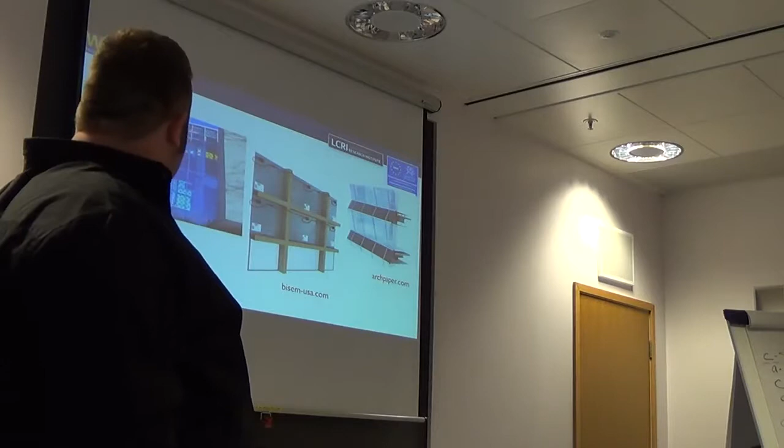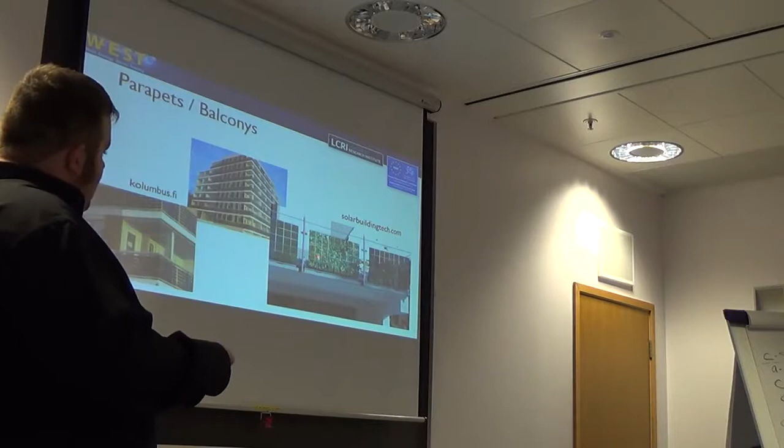Then of course here, they've decided to do something interesting again, where the PVs don't occupy a large area of the glass, they're sort of embedded within it, but in this sort of pattern, so that's allowed an awful lot of light through. And then yeah, we've talked about balcony systems. This is making it visible. It's the same job that a bit of toughened glass will be doing here. It's just that it's got PVs sandwiched in the middle, so it's doing something useful.

So thinking about rooftops, if we've got flat roofs, we can be sticking it straight on the top of the building. And there's other technologies now, Stuart was talking about flexible PV. We're looking at, like, the dye-sensitised stuff that's produced on reel-to-reel. There are technologies now where PV can just be literally rolled out on top of a flat roof building and secured down. But then also, if we've got a large area, we can use angled mounts to orientate the PVs a little bit better in respect of the sun.

And obviously this isn't such a clean look, but if it's not going to be seen, or if it's quite utilitarian, or if it's something like a supermarket where you've got a bit of facade around the outside of the roofs, you don't actually see the flat roof behind, that's something that could be a good option. And then you've got these solar slates.

Now, this system is C21 by Solar Century, and they've designed a solar slate that integrates really well with the Lafarge concrete roofing tile. So the profile is exactly the same. These roofing tiles are just a standard stock item that comes from the builder's merchant. And the C21 solar slate is the same depth as the concrete tile, but it's obviously much wider. And they can be carried up and just screwed onto the roofing battens in the same manner as the concrete tiles would be hung on them.

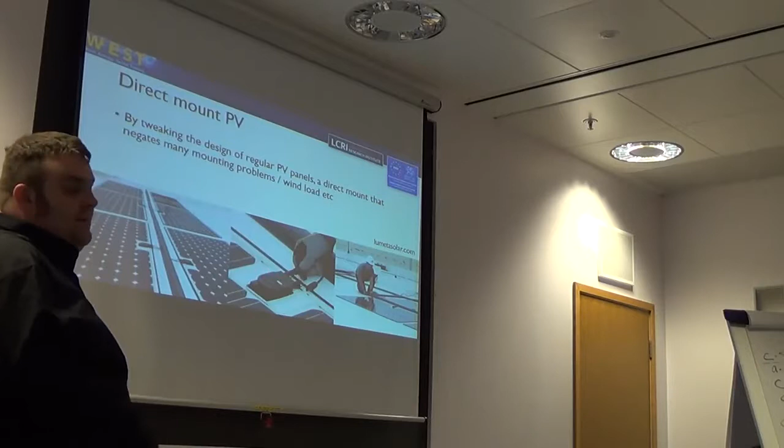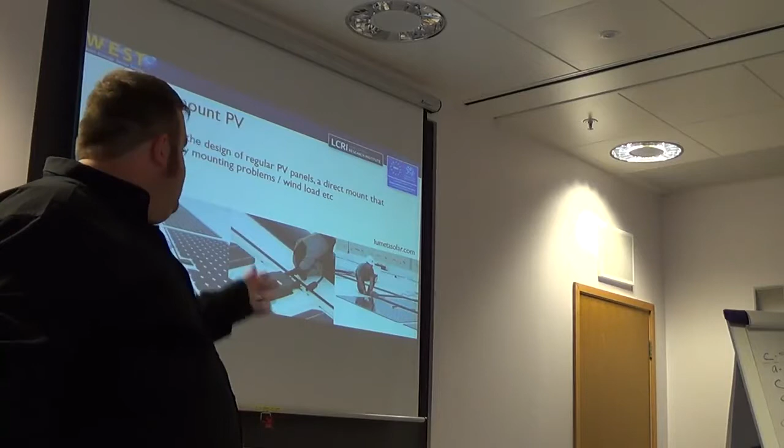We're talking about mounting stuff horizontally onto roofs. These are PV modules where they've said, okay, we'll miss out a couple of solar cells from the top of the module, and we'll integrate small little micro inverters into each module. And the beauty of that is that if we mount them on the top of the module, obviously they're waterproof, ingress protected, all the rest of it, but we put it in a location where it's really easy to then service that module without having to lift it up off the roof or disturb the mounting system. So I think that's quite a smart design where someone's thought about that.

There's a handout at the back and in your packs about different types of inverters and smart new technologies. But this has obviously been designed to be easy to maintain in this sort of commercial application.

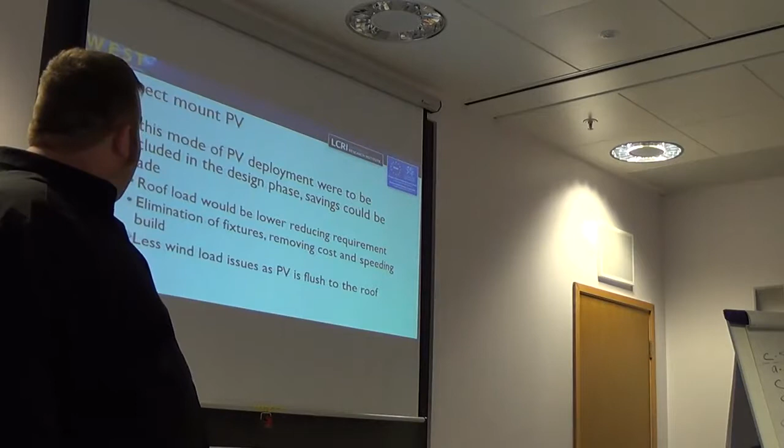Now, a little bit less attractive. You wouldn't necessarily want them mounted on the side of your house with all the inverters visible, but on something like that application, commercial roof, flat roof, no one's going to see it other than if they're using Google Earth. Why not? So direct mount PV, there's different things to think about.

It's going to be lower roof load if you can use the PV as the roofing material itself, because obviously you've not got the additional weight then of a roofing material, a PV mounting system and PV on top. It's reducing fixtures. Wherever you've got fixtures and penetrations, you've got the potential for failure and defects.

And also, there's less potential for wind load because your PVs are flush to the roof and sealed at the edges. There's no way the wind is getting under that and trying to lift anything up or blow anything away. And so we can also do interesting things here with direct mount PV.

And the thing with BIPV, and this is where I think there's a real potential avenue for consultancy firms, is in joining up the thinking between the different trades within the building team. Because at the moment, if it's a retrofit installation, you might get a firm that goes up on the roof. I think, did you talk about a little bit of this in your presentation at all? No, okay. So you might have one firm that goes up, puts your cells up on the roof. Whereas, if you're going to integrate it into the building, there's got to be a lot more consideration of how things interlink.

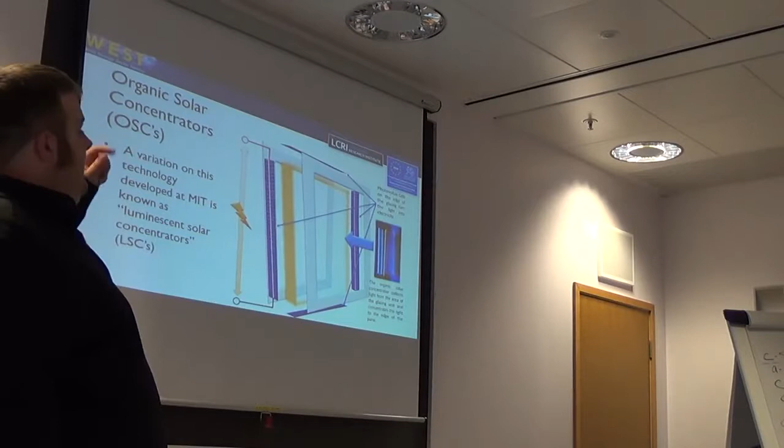And so we've got this idea of organic solar concentrators, which are a bit like, I used to play with Lego as a kid, and I remember there were these bits in one of the Lego kits that I got that just absolutely amazed me, because in ambient light, it looked as if they were glowing, as if there was a little bit of light at the end.

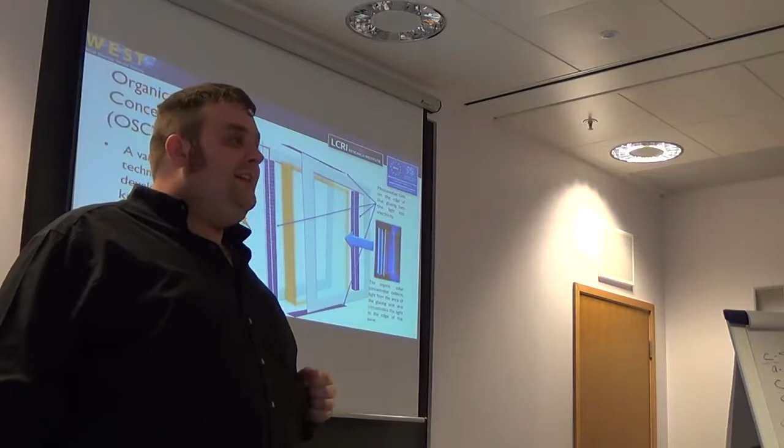And they were like a sort of fluorescent green plastic, and they acted as a waveguide to take the light from the wide area, and because of their shape they concentrated it towards the end where it appeared to glow. It wasn't glowing, it was just capturing the light from a much wider area.

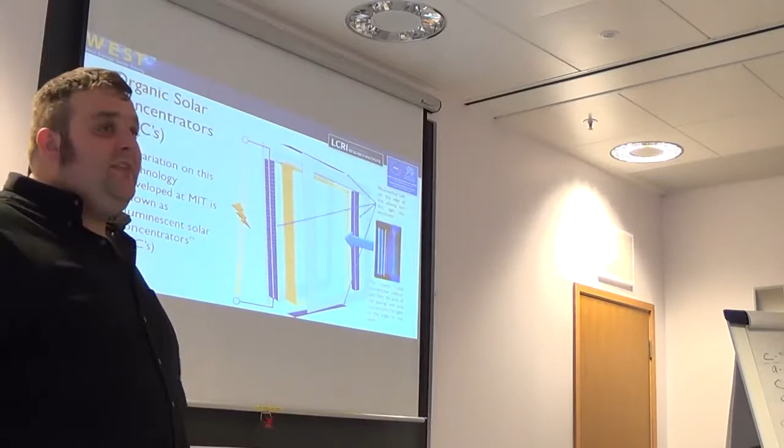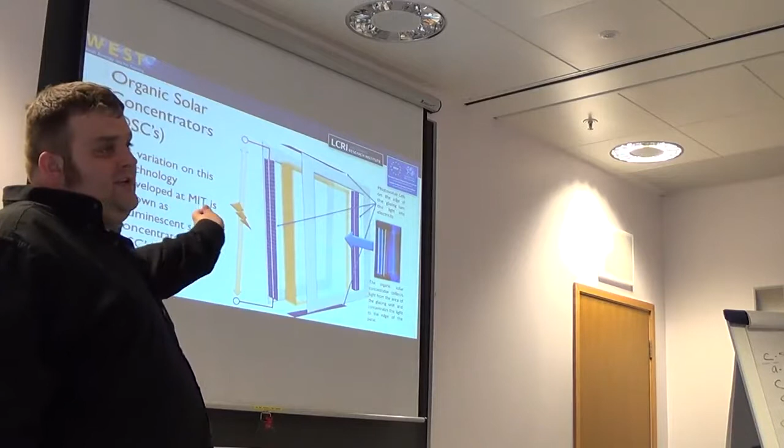And so if you look here, we've got these plastics where they're taking light from across the surface, but the light gets concentrated at the edges, and the edges appear to glow. And so this is potentially where you could put thin strips of PV material in order to generate electricity from this window. And of course the great thing is that it's also semi-transparent as well.

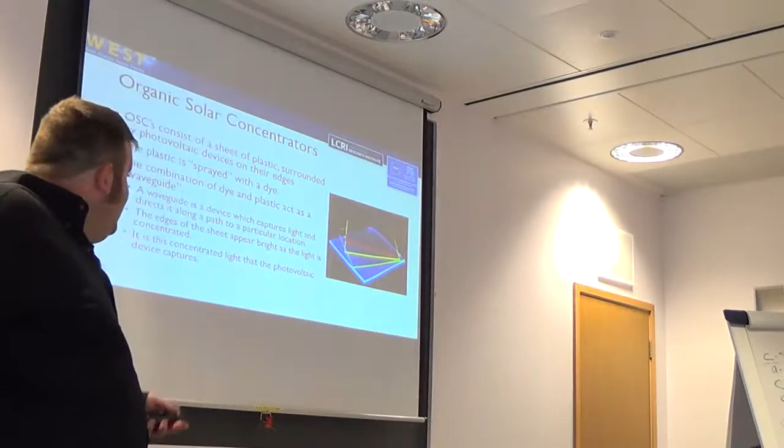So the sheet of plastic is sprayed with a dye, and it acts as a waveguide in combination. And so the edges of the sheet appear bright, and as we've said, that's what the PV captures.

Now, there's a challenge with this, in that as the light hits, the dye absorbs the light, and that causes the electrons in those molecules to jump to a higher energy level. And when they fall back down to a lower energy level, the dyes release that energy back into the plastic in the form of heat. So there's a bit of inefficiency there.

But the light that doesn't bounces around inside the plastic in the same way that, if you think about fibre optic cables, you can send light over vast distances for telecommunications, because the light bounces off the side in a process called total internal reflection. And this is what this sort of device is hoping to do here.

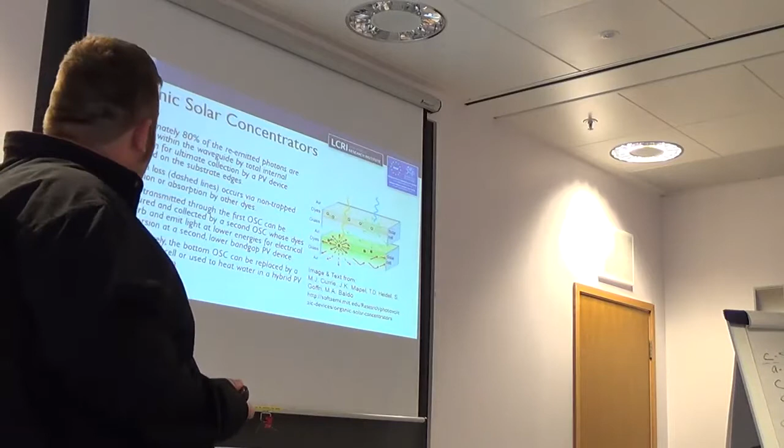Now, MIT, you've got about 80% of the re-emitted photons which are trapped within it. So that's where the inefficiency comes from.

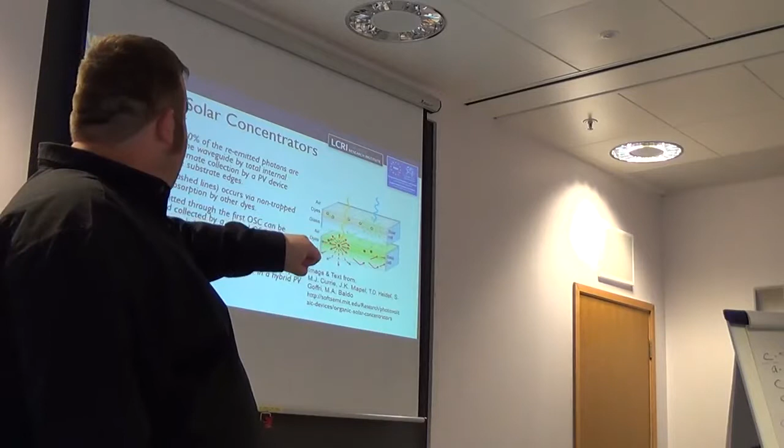And MIT have looked at this and they've said, okay, there's a different way of looking at this. There's a couple of different things. So first of all, they're saying some of the light will go straight through, and so we could do something else by making a multi-layer device. We could put something that captures solar thermal energy, a solar thermal collector, so we generate electricity first of all going through the solar concentrator, and then residual light is picked up by a much cheaper device. That obviously isn't transparent, it doesn't give you the window property.

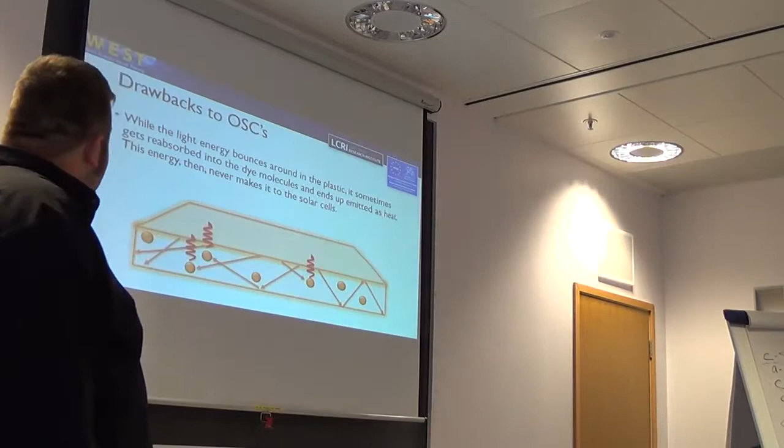Or we could layer these devices and have different sheets with slightly different coloured dyes in to capture light at different wavelengths. But as I've said, where the dyes in this particular type of cell absorb the light energy, you get a little bit of heat produced, and that results in inefficiency.

So MIT looked at it a different way, and they said rather than this sort of plastic with the dye embedded, we'll replace it with a sheet of glass and we'll coat that glass with the dye. And the special dye will re-emit light at a different wavelength from the wavelength that the dyes will absorb. And so this gets around some of the problem of reabsorption and inefficiency.

But this is something for the future. It's not something that's going to be around immediately, but it's looking at the sort of technologies where scientists are starting to look for building integrated PV and for glazing.

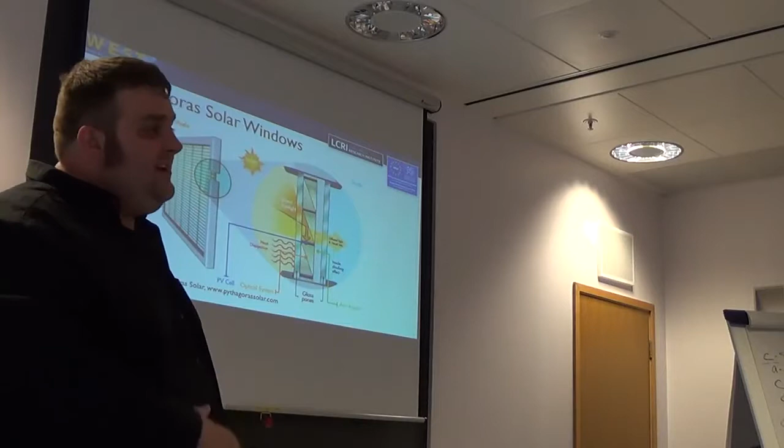Now this is something that is a lot simpler. It's a much nearer term technology because this is just using, I presume it's crystalline silicon, the technology that we've seen. And what they're saying is if you think about Venetian blinds, that hang on one side of the window, lots of little slats with bits of string in between suspending them, they provide a function of shading, and actually if they're all horizontal it's quite good because they capture that high summer sun but they allow the low winter sun to pass through.

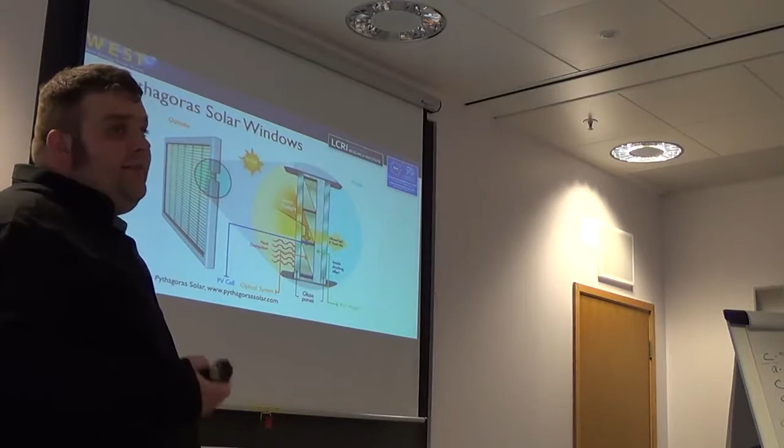And so what about if rather than having a Venetian blind on the outside, and okay, it gives you flexibility, you can pull it up and you can change the angle of the slats and all the rest of it. What about if we made a double glazed unit with the glass very wide and spread apart, and we'll have layers of PV running in between these two sheets of glass. So it looks very similar to a Venetian blind, it's just that it's inside the window and you can't change the angle of the slats or roll them up or whatever.

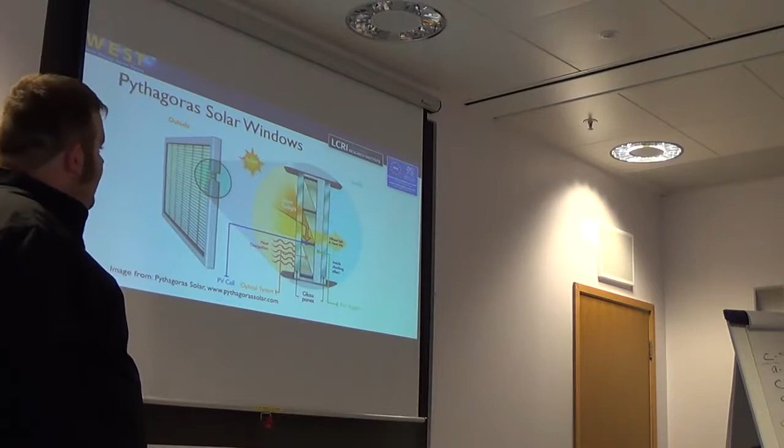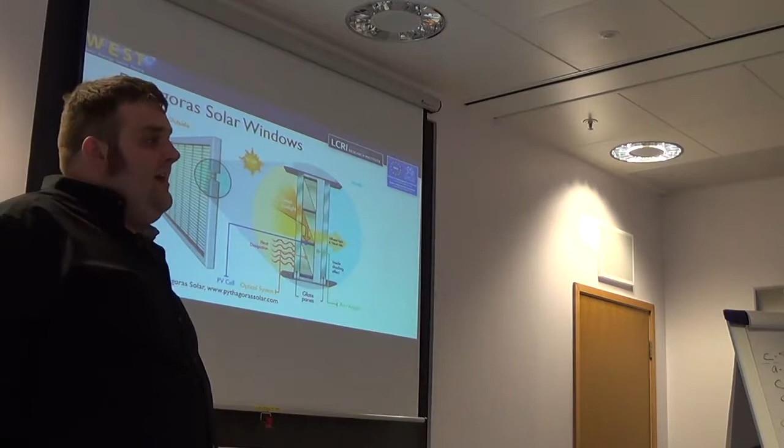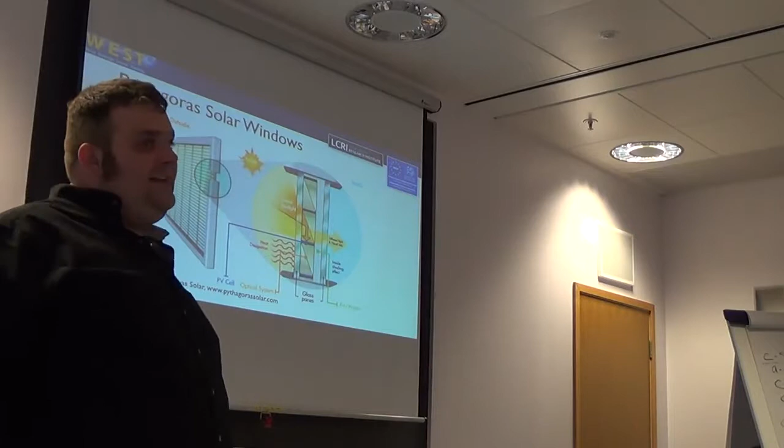But the great thing is, obviously, with a double glazed unit, if you keep the glass far apart, you provide a nice big cavity in there, which you can fill with air or you could fill with argon gas. Because of this wide cavity, you've got really good thermal properties to the window, so you're not going to be losing as much heat through the window. And you're stopping overheating in the summer because the photovoltaic devices are acting as shading.

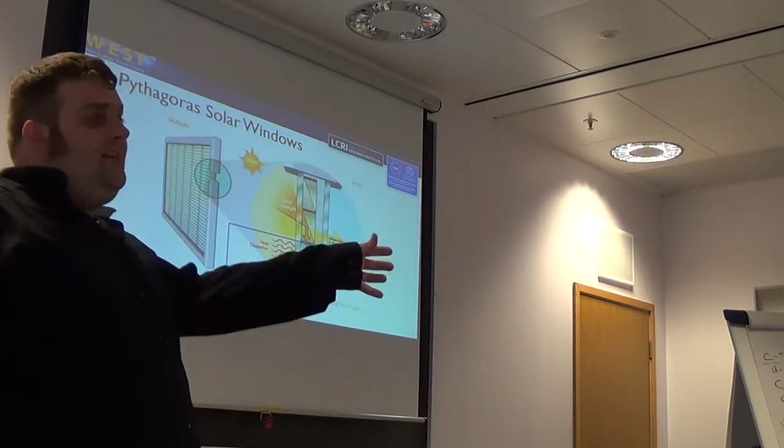And if you're looking through it on the level, you've still got good optical properties with the window. You can still see through it and look at the view outside. So this is something that's quite interesting and multifunctional. You've got that visual information, you've got diffuse light through the building, but at the same time, you're trying to prevent heat from entering the building in the summer.

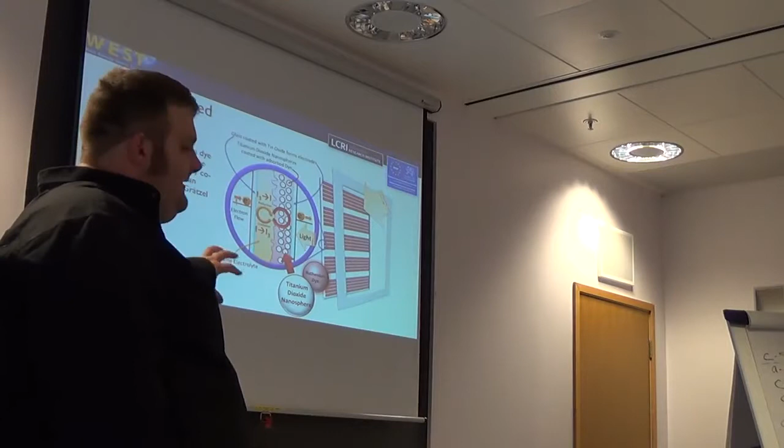Now, talking about dye-sensitised solar cells, we were talking about a company here called Dyesol that makes this sort of solar cells. And here you've got a dye. Now there's kits that you can buy where you can make this sort of dye-sensitised solar cell, also called Gratzel cells or excitonic cells, with a dye that literally comes from crushed up blackberries or raspberries, and there's things in there called anthocyanins that fulfil the property that's required of this dye.

I'm not going to go into the chemistry of it all because I don't think necessarily that's helpful, but the main things to take home about this technology is that it can be done on a roll-to-roll process. We saw what G24i were doing in the earlier presentation. It's one of those things where it's layers of material that can be deposited onto a cheap substrate in a continuous process. And also there's the possibility to make this flexible, and we've already looked at some of the potentials for flexible solar cells. Obviously you can't do that with a glass-based system.

There's small amounts of platinum and ruthenium in the process, which are quite expensive, and that's something that they're working hard to eliminate. There's also problems with stability and degradation. If you think about silicon PV, a lot of thin film PV, it's very mature technology. People know that these cells are out there and that they'll last and that they're durable. However, at the moment, dye-sensitised solar cells aren't quite there. They don't quite last as long.

However, obviously, there's really clever people that sit in rooms and committees and talk about the developments and where the technology's going and what can be expected from it. So in the European photovoltaic roadmap, they're really confident that these degradation mechanisms can be addressed in time with research, which is universities saying, give us more money. And they're saying that if we can overcome some of these challenges, they can really start making a contribution to the PV generation mix by 2020. So, interesting possibilities with this technology.